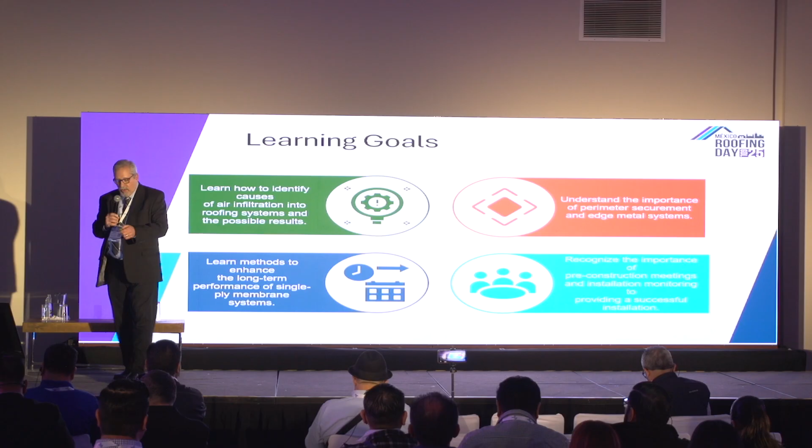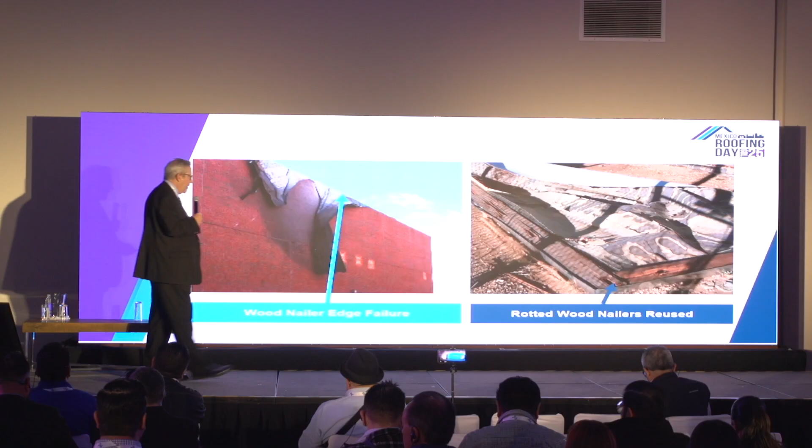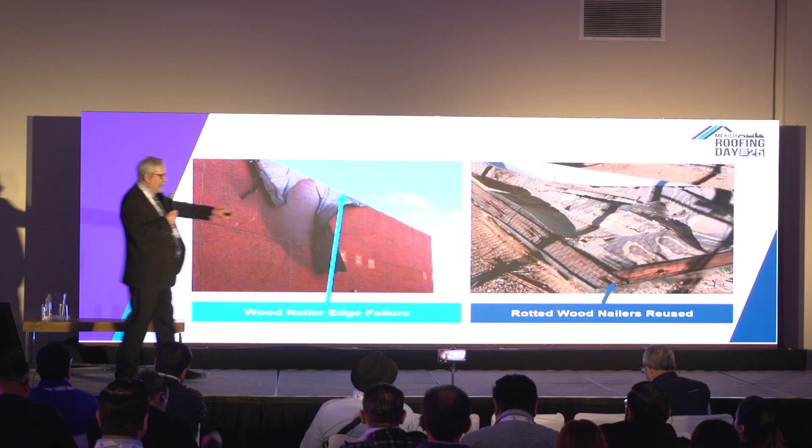Now, a lot of this stuff has already been talked about, but one of the things that actually keeps metalwork in place is going to be the wood nailers, the ones that we secure around the perimeter edge to make sure that we don't end up with these kinds of issues. And they have to be investigated, especially in re-roof applications. If the wood is rotted and has problems, it's not going to stay in place. If it's reused, it has to be replaced with new to extend that durability.

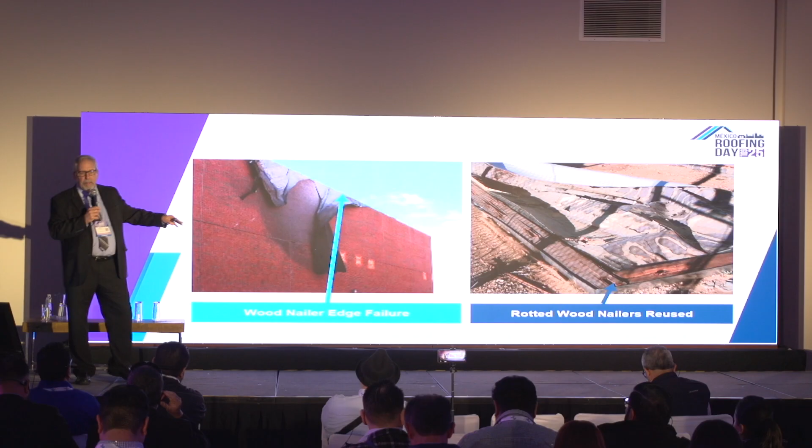And the last thing we want is to have our roofing material look like a banner on the side of a building, waving in the wind to the customers and the people that go by. It doesn't tell a good story at all.

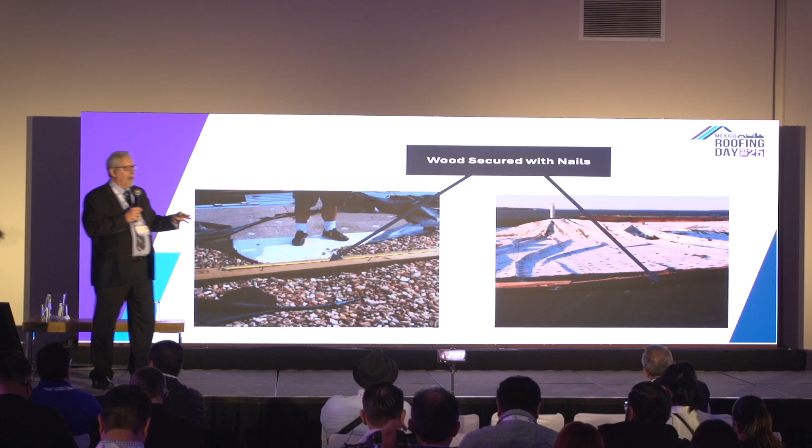There is some stuff like using nails instead of screws, and that's bad. Because nails go in really nicely. They go in straight, they go in fast. Unfortunately, it doesn't take a lot of work or effort to make those nails come back out. They come out just as easily. So when we're securing wood nailers, we need to make sure that we're securing them with screws so that they're tightly in place to be able to withstand the wind resistance.

There's a document that's out there. There's a lot of standards that can be used. This one is from FM. It's the Factory Mutual Property Loss Prevention Data Sheet 1-49. And it gives directions on how to install wood nailers to make sure they stay in place associated to the wind, giving them long-term durability. Right now in the industry, this is the strongest one that's being used. There are a couple of other ones, but this is the primary one.

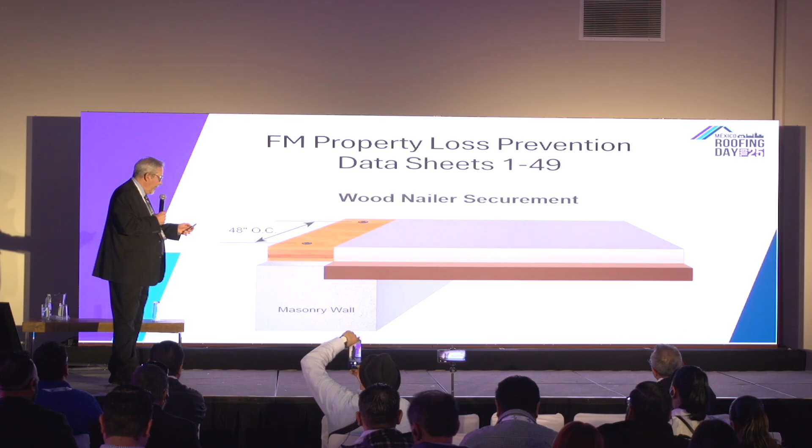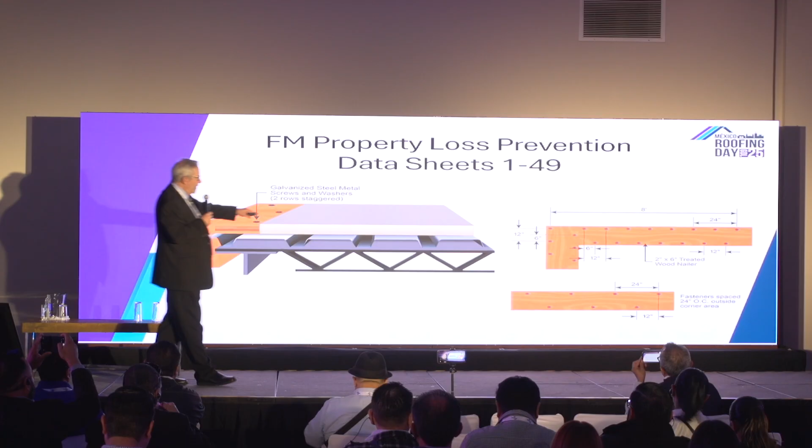This is for steel deck application. We're looking for 2 rows of fasteners staggered at 24 inches on center. But as we've discussed already in a couple of other presentations, wind resistance has different areas on a roof, such as the field, the perimeter, and the corners. So when the fastening gets closer to the corners, they double the fasteners to compensate for that additional pressure in those corners to make sure they resist the wind.

So these are some of the things to keep in mind. Review the existing conditions, specify screws, and try to follow the FM 1-49 or talk with your manufacturer or your consultant to see what the guidelines are, to make sure that these are all correctly followed. Then the metal edging goes on.

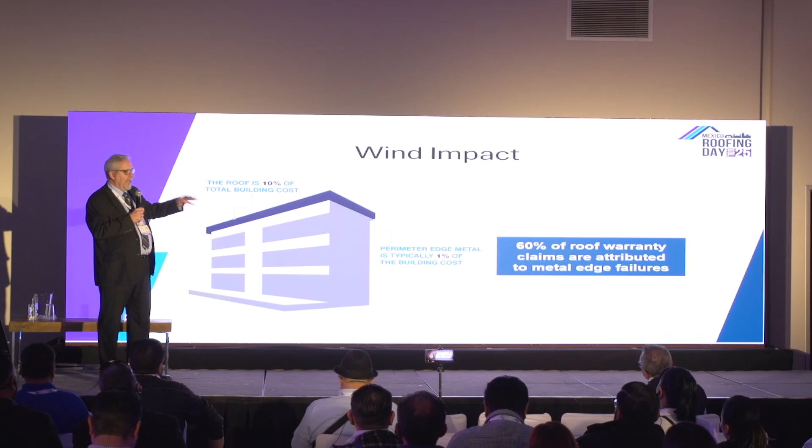Now, back in the US, we're finding that a building roof system costs about 10% of the whole structure. And out of that 10% cost, only 1% of it is actually the metal edging, the edging that holds the roof system in place. 60% of the litigations that we have and 60% of the warranty problems that we have are associated to wind and to the metal edging. So this is one of the biggest performance issues out there versus the roof system, and it needs to be enhanced accordingly to make sure that it's installed correctly.

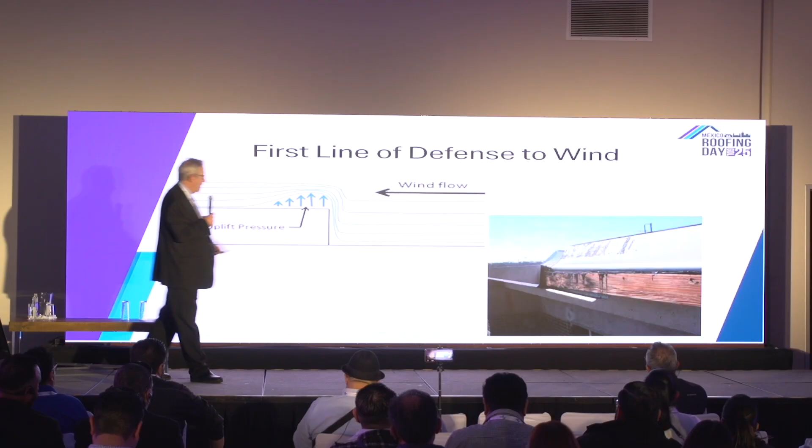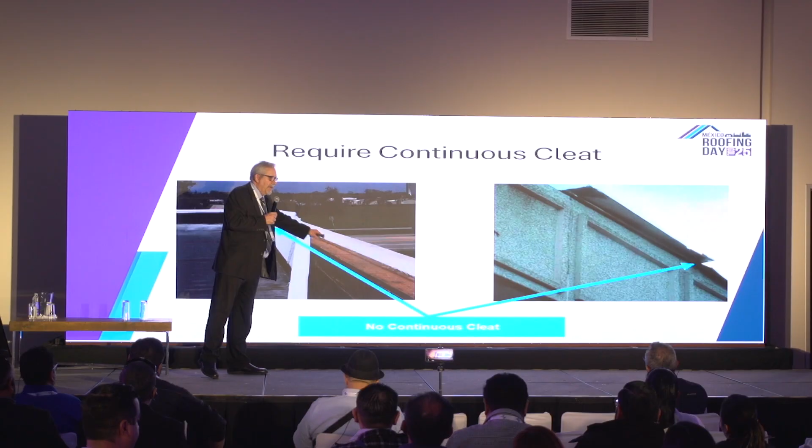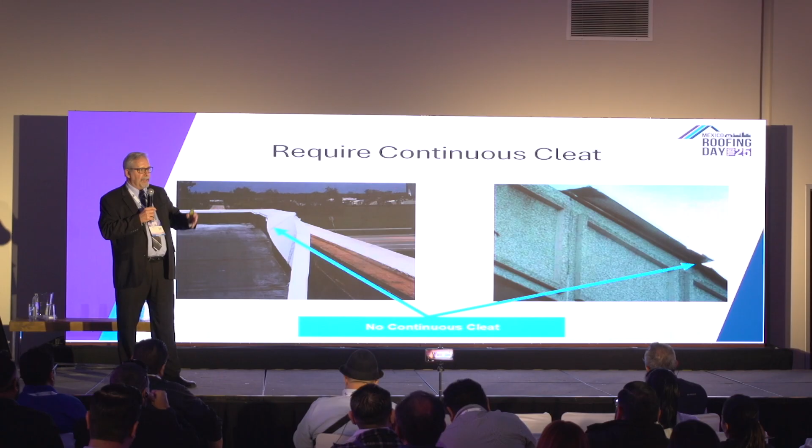These are some other conditions where they didn't use continuous cleat. Though I do like to point out that this particular one has got an EIFS or a Dryvit type of material. It's not really structural to start with, so that's another thing to look at when you're trying to install properly. Make sure the materials are compatible and that there's actually structural interface when you're using fasteners and screws. In this case, the wind hit the fascia of the building, came upward, grabbed the metalwork, and started peeling it free.

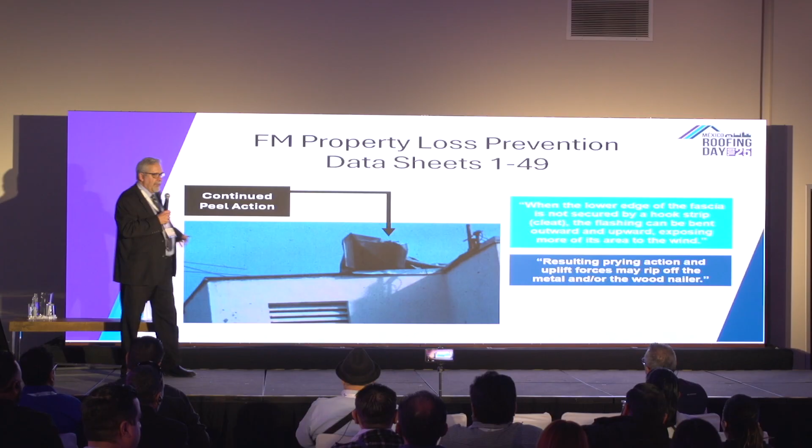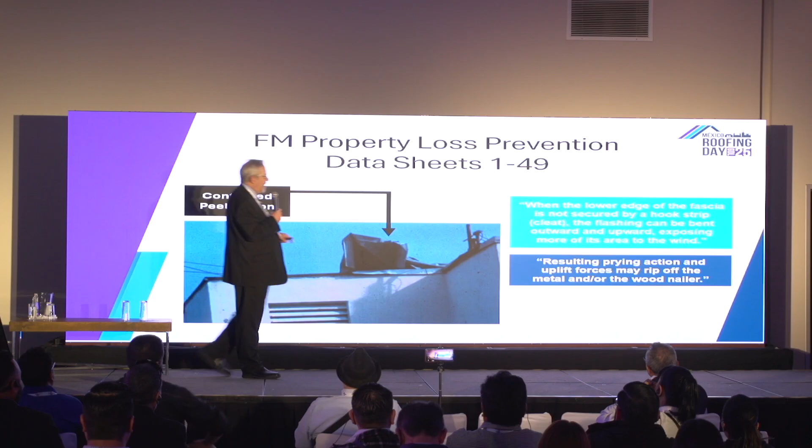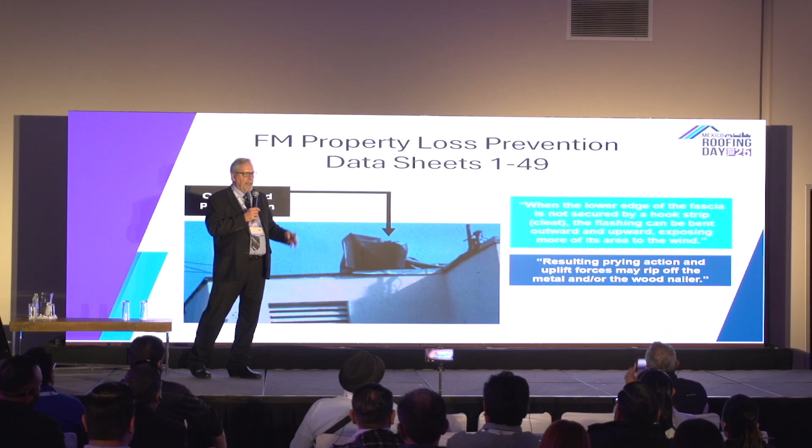Best case scenario, the roof system starts to roll itself up for re-roofing, making it easier for tear off. Not what you want, though. And these are some comments that came from Factory Mutual. When the lower edge of the fascia is not secured by a hook strip cleat, the flashing can be bent outward and upward, exposing more of its area to the wind's effect. The resulting prying action and uplift forces may rip off metal and/or the wood nailers, possibly leading to a catastrophic roof failure at that point.

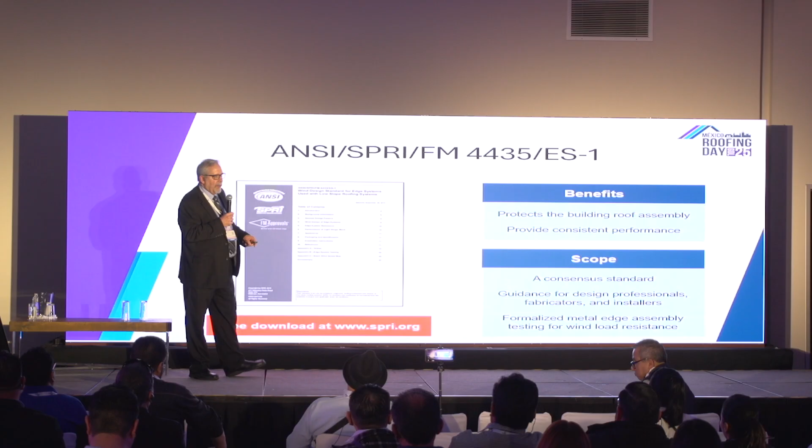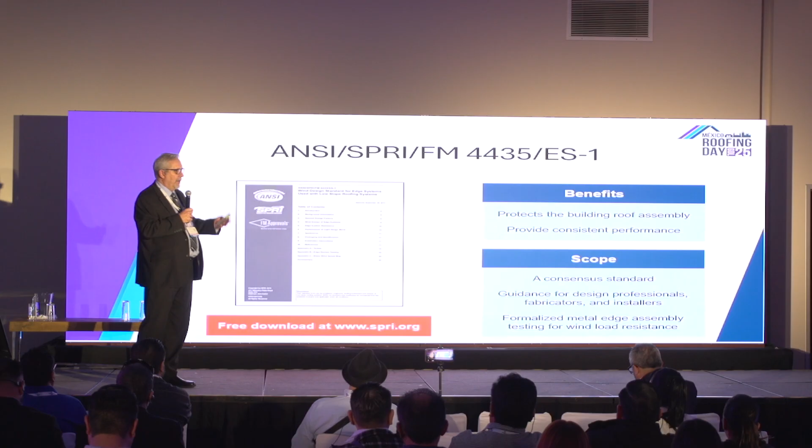To make sure that the metalwork meets this criteria, there's a standard, ANSI/SPRI/FM 4435/ES-1, better known as just ES-1. With this document, we are now able to test metalwork to meet the pressures associated to it. And this can be done with either prefabricated metalwork or shop fabricated metalwork. The difficulty with shop fabricated metalwork is that they need to be trained properly, following the correct guidelines, bending it properly, correct gauge, and then, of course, securing it the same way. So it needs to be all followed properly.

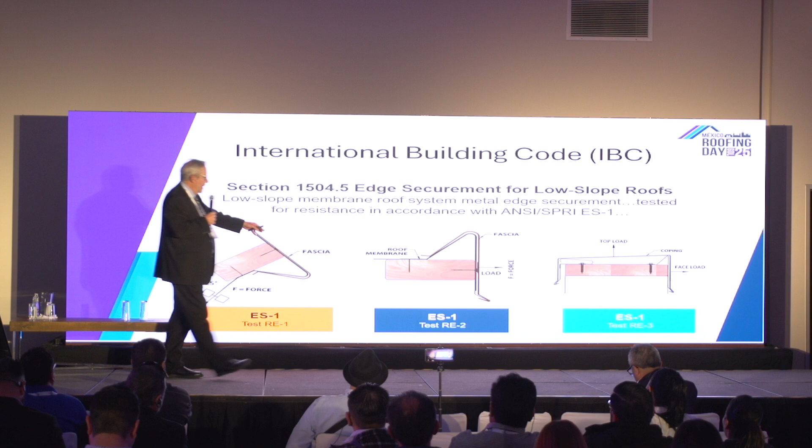This is the testing parameter that we use, where we have RE-1, RE-2, and RE-3. RE-1 is used for mechanically fastened and ballasted systems because the membrane behind is loose. RE-2 is usually used for all systems, where you have the force being pulled on the outside, and RE-3 is for coping caps.

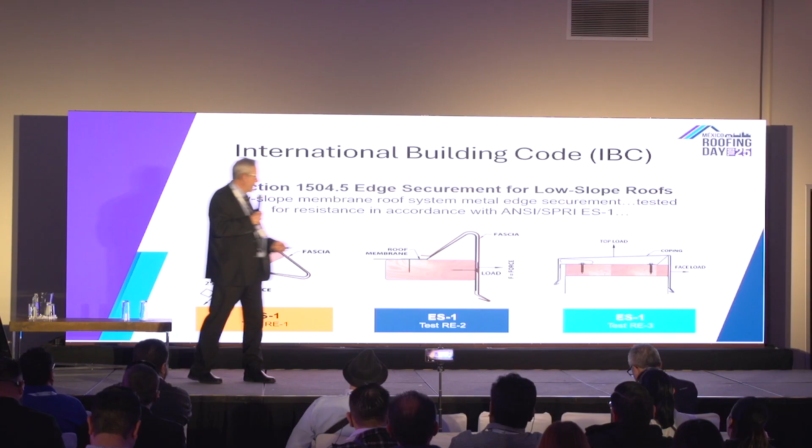I do apologize, I did not have time to convert this into metric, but you're all smart here. You're all kind of like engineers. I figured you could figure it out.

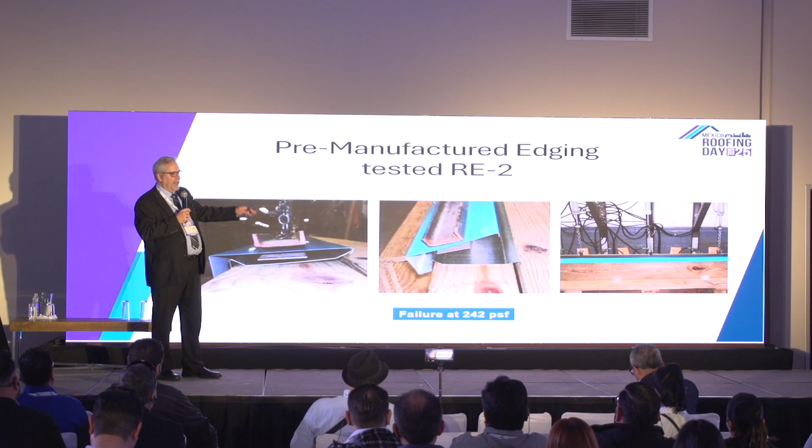This is a pre-manufactured one. This has already been tested in the laboratory. This one actually has 242 pounds per square foot, significantly better uplift performance in this application, and easier installation. And the only training you have to do for your guys is basically show them how it's installed. Some additional benefits: you get high uplift. The product is sustainable and reusable. These products can actually be taken off and then reused on the job again.

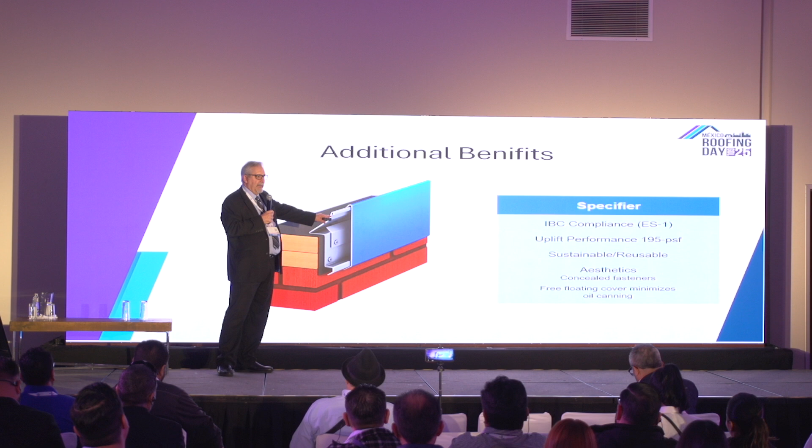I've also found a personal benefit where they have this fascia cover. It's separate from the actual waterproofing or watertight condition. Say if a ladder hits this and damages it, it's easier to pop it off and replace it without ever having to affect any kind of flashing material or watertight integrity of the system. So keep that in mind.

Cost is a big deal. Replacing the roof is a big deal, and it doesn't cost very much to put a proper metalwork that meets the ES1, be it prefabricated or shop fabricated. Reducing that criteria, the biggest thing is remembering that continuous cleat.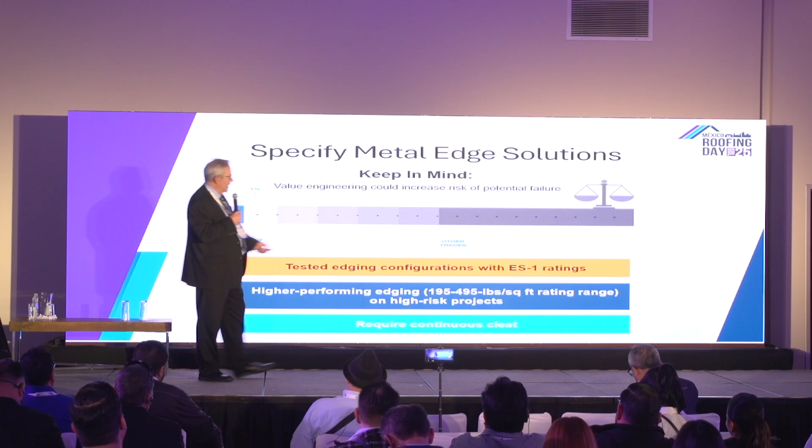Internal and external air pressure: a lot of this is external pressure we deal with a lot, but internal pressure a lot of times is sort of ignored because that's supposedly been addressed somehow in the engineering. Unfortunately, there are certain factors that come in that affect the roofing system that are unexpected.

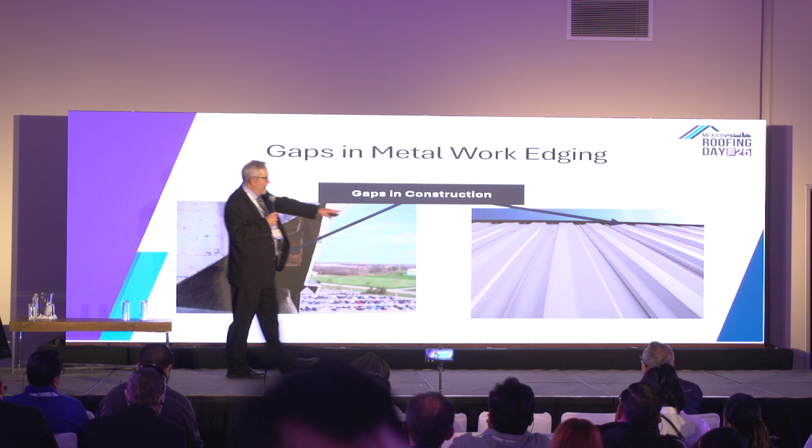This is just sort of a little bit poor construction where there was actually an opening within the metalwork, so the wind just pumped right into the roof system, weakening its wind performance. In this case, there was a gap underneath because the corrugation of the metal wall went under this capping, and that air pressure moved itself in.

In this design, this is a parapet wall, and below they did not seal this parapet open cavity, so all the hot, humid air from the interior of the building migrated into this wall, found a place to condense, and it caused rotting and mold problems where they started having issues.

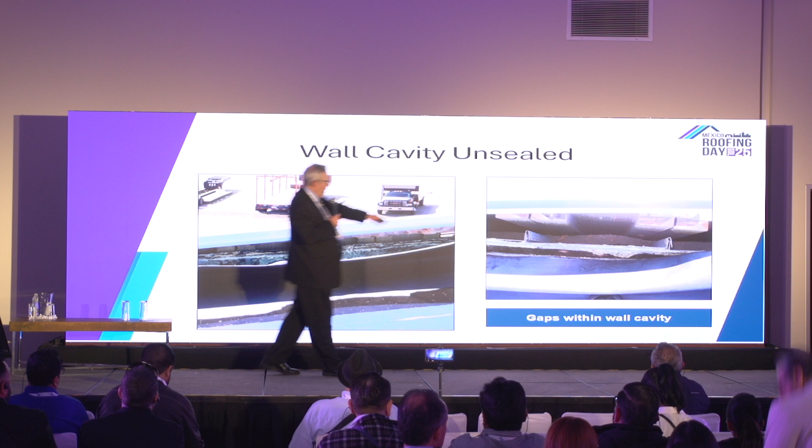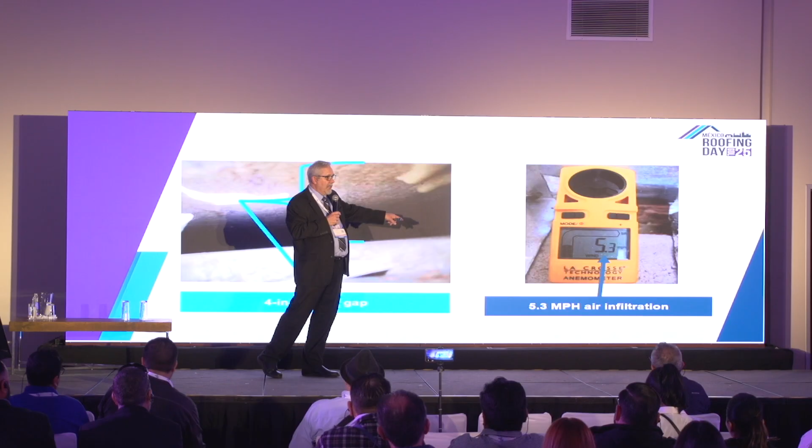And this is just a close-up seeing how big that gap actually is. Since they didn't seal it up, it just allowed a lot of pressure to build up into it. This is a 4-inch wide gap, and they got 5.3 miles per hour wind coming from that. So a significant amount of wind force being presented by pumping that directly into the roof assembly and weakening its performance long-term.

This one actually has an air barrier that failed, and that's the air pressure that's coming out from inside that building. Since that failed off that wall, and since this is the primary waterproofing membrane right along there, all that went right into the roof system. And whatever was carrying it, if it was hot, humid air, or just air pressure, it started to weaken the system.

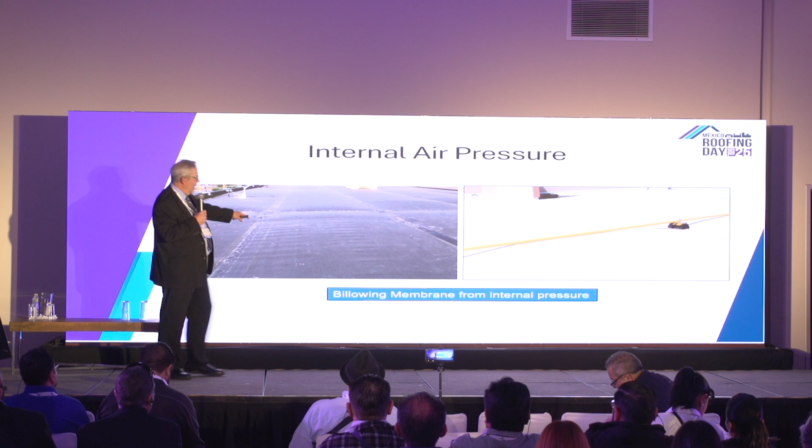And this is what it might look like. Very active HVAC units, internal pressure within the building, and this is a mechanically fastened system, so this membrane will continually billow with this kind of additional pressure. It's not going to weaken the rating associated to it, but it could fatigue the membrane long-term and cause some problems. So we want to control that so we don't have that type of pressure.

There was a project that I had actually in Philadelphia, Pennsylvania, and they had an adhered system. The membrane was adhered to the insulation, and the internal pressure was so great that the membrane popped off. They came back and tried to reapply the membrane, and it popped off again because the internal pressure was so great the adhesives could not cure up.

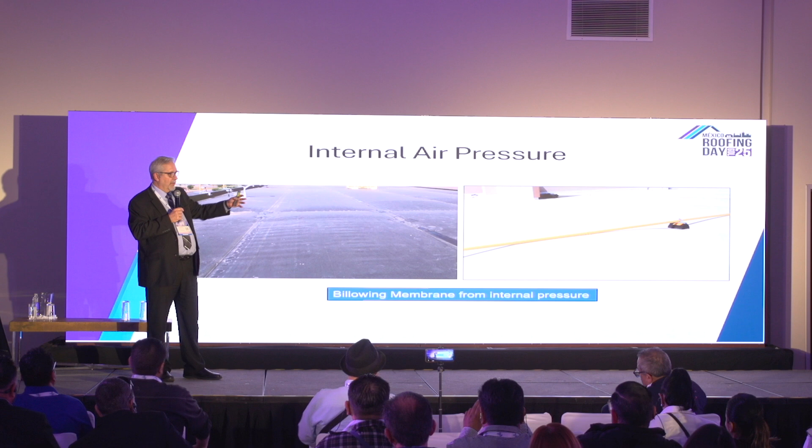They did a lot of searching and found out that this was a 60-story building, and all the air pressure was building up as it stacks up throughout the building. So when it got to that point, they found a hole that was actually pumping air into that space. Once they closed that off, they were able to finally repair the roof. But that took 6 months of investigation to find out.

So it's very important, if we're trying to minimize wind performance issues, to isolate the system from the interior pressure. If it's unknown, it's always a good idea just to seal the penetrations at the deck level and seal the joints between the deck and walls. That way, at least you're mitigating that much pressure from getting into the system.

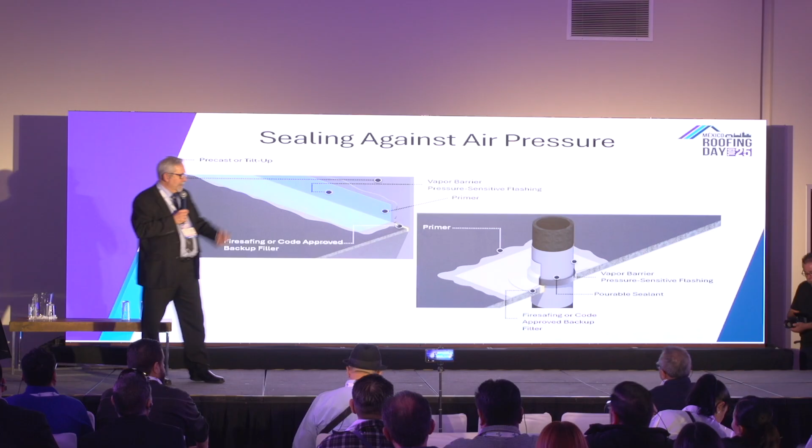Steel decks might be a little bit harder than doing that, so you may have to use some kind of sheet good to basically seal it up, making sure that all that air pressure is caught inside the building and doesn't move into the system itself. So outside airflow must be sealed, so you don't have any kind of problems. Sealing cavity walls in the interior and sealing the deck and penetrations are very important.

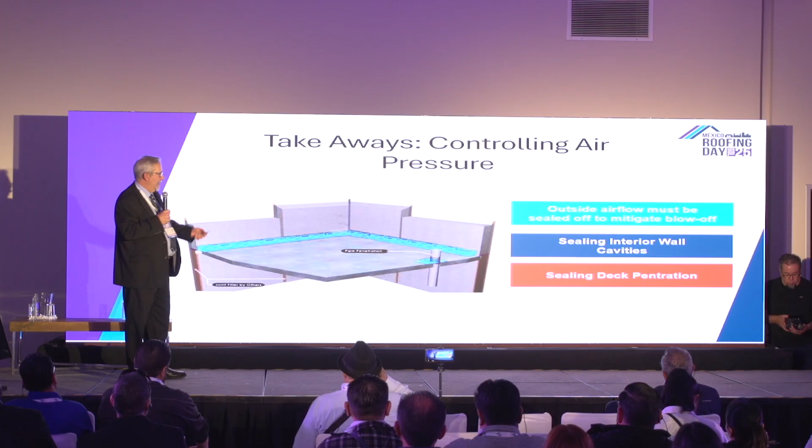Now, standing seam metal roofs, or metal roofs around here, are very popular. So this is some of the things that we've been seeing. There are a lot of different configurations of metal roofs and how they're used, from corrugation to fluted.

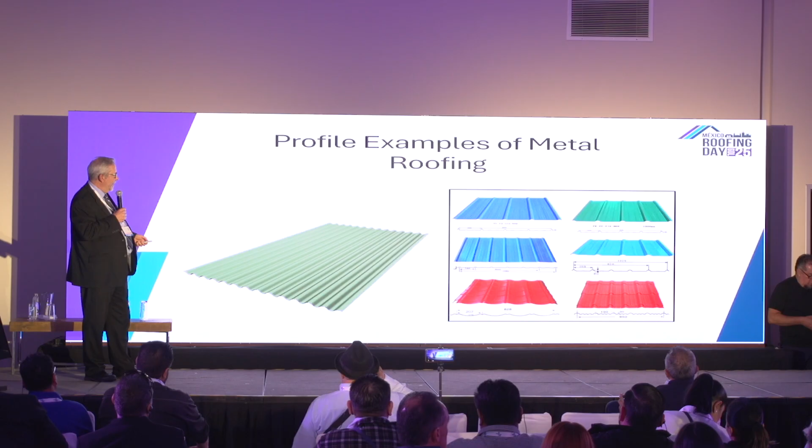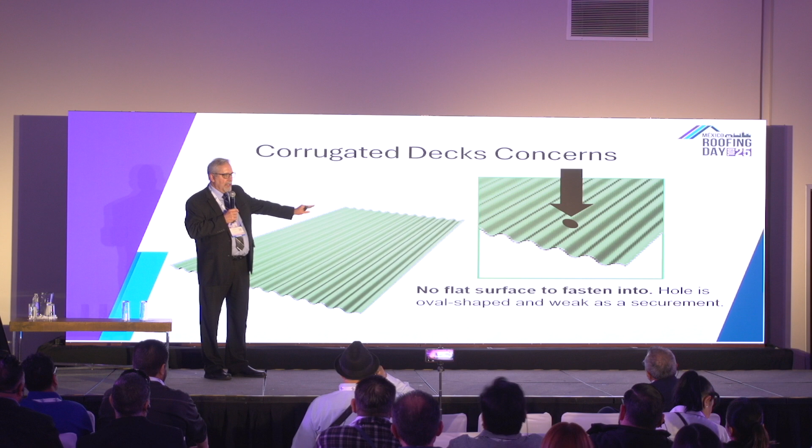Problem with corrugation is that I've had people actually try to install mechanically fastened systems directly over these things. And what happens is, mechanically fastened system, the fasteners are designed to go perpendicular into the metal deck. When you have a curvature, you're not getting a circle, you're getting an oval, and the fastener is not working properly. And you could actually have a ratcheting effect where the fasteners will slowly back up. So it's not a long-term performance that's going to happen. You're going to have a very weak system long-term wise.

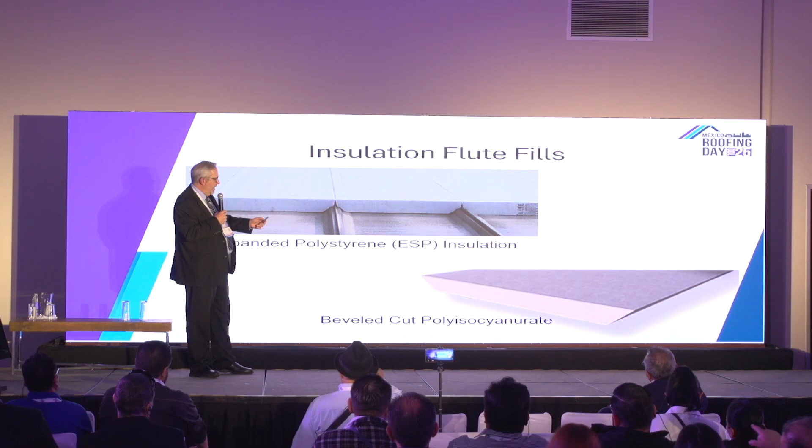Other systems with the flutes, typically what we do is we fill them up with insulation, and then we put the system over the top of it. And manufacturers make these bevel cut products to be able to fit into them properly.

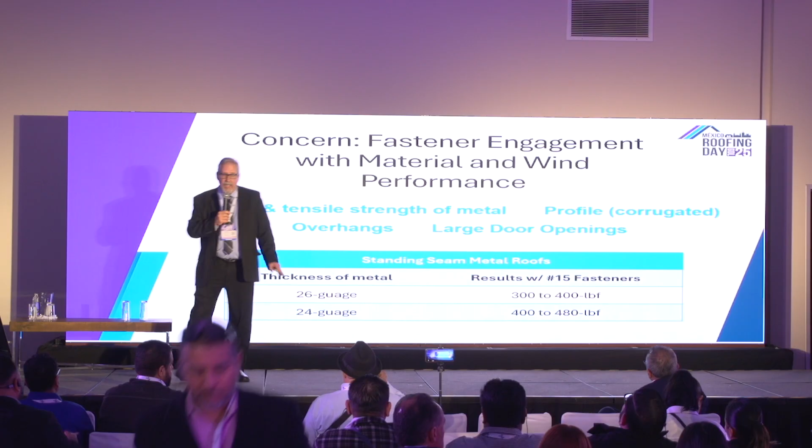When you're looking at fastener engagements, typically if you're trying to go right into the pan, they're usually 26 or 24 gauge, so they're very thin. Using a number 15 fastener, you typically only get the 300 to 400 pound pull values out of the weaker materials. And these materials are not tested in laboratories. They could if they wanted to. There's actually a protocol within the design criteria for doing that, but manufacturers don't do that because they know it's going to fail. So they don't do it.

So keep that in mind that these decks, though they will accept the fasteners, they need to be looked at very closely to be able to confirm you're meeting the pressures necessary to withstand and be resilient.

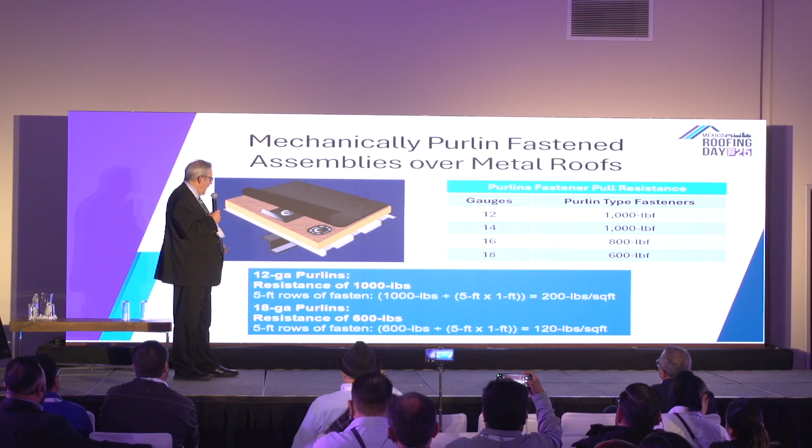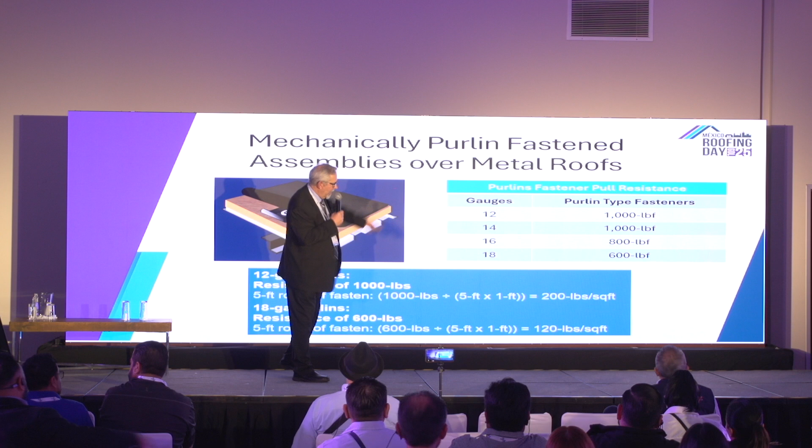Most of the designs that are offered are fastening into the purlins, and the purlin fastener engagement is very, very strong comparatively, where we're getting from a 600 pound pull to a 1000 pound pull, and those calculations or those fastenings come out to a very significant performance characteristic of 200 pounds per square foot. So fastening into the structure versus the metal pan is going to give you the long-term performance that you want out of that system.

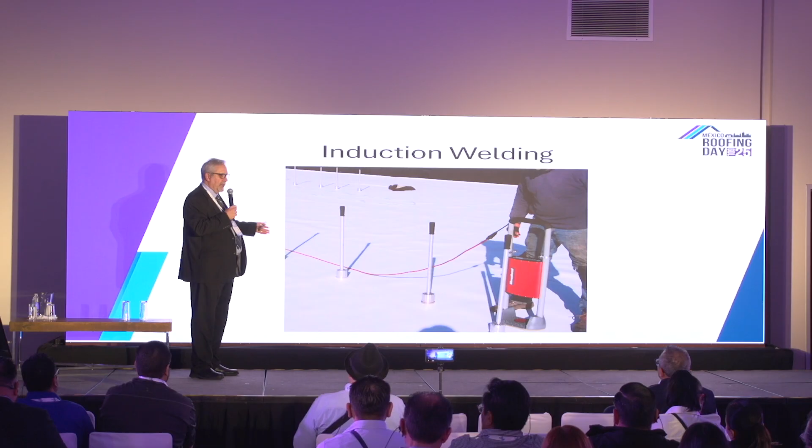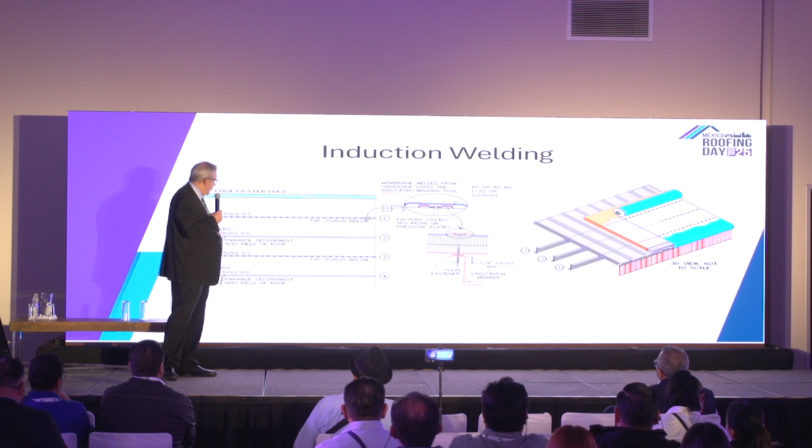And there are other types of systems to help make it even more convenient. There are these induction welded systems where you can fasten the plates into the purlins and then heat weld the membrane directly to it. So you don't have to have custom made sheets. You can just use whatever the manufacturer offers, very large ones, and you just have to heat weld the seams accordingly. And there are specifications on how to lay out the plates for perimeter areas. They're usually what we refer to as fingers coming in the edges, and that gives you an idea of how to make that actually a very aesthetically looking type of design.

Now there is a third way of doing it, and you could do adhered systems to it, where we're actually going to be fastening in the insulation to the deck metal pan. Calculated wise, it does come out reasonable, between 75 and 100 pounds per square foot, and then you can adhere the membrane. So you fill the flutes, put your insulation or cover board, fasten it down, and then put the membrane down in adhesive.

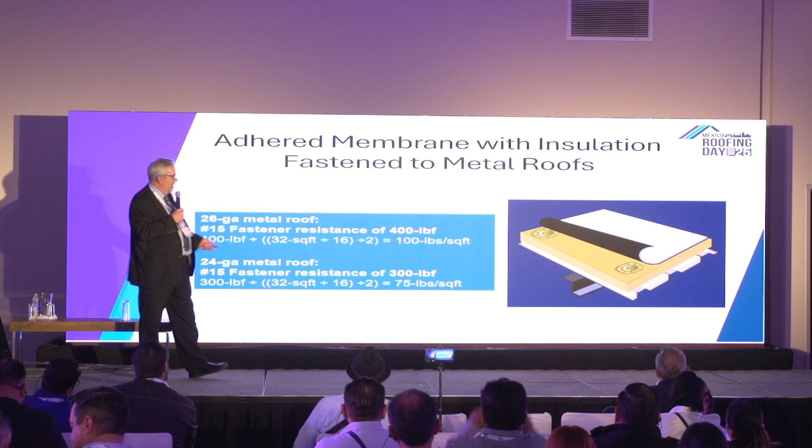Then there's also ribbon type of applications, the 2-part urethane adhesives, where you can actually do a serpentine pattern in the pan and flute, fill up the insulation, then continue the insulation with a cover board, and then you can put down your membrane system. No fasteners are used at that point.

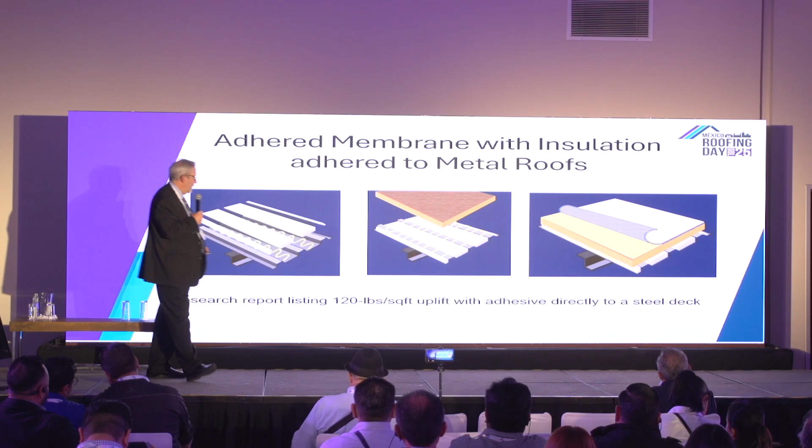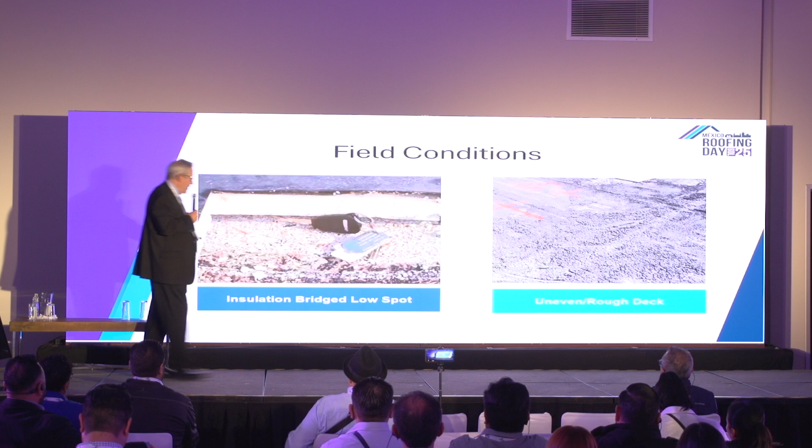Insulation adhesives sort of leads us into this, because we want to make sure that we have correct surfaces to apply the 2-part urethane adhesive. This is a cementitious wood fiber, but it was uneven. So the boards were not getting good engagement with the adhesive, and they were getting weak attachment. Concrete is supposed to be smooth; this is looking very rough and uneven also. So those are surfaces that we do not want to try to use adhesives on.

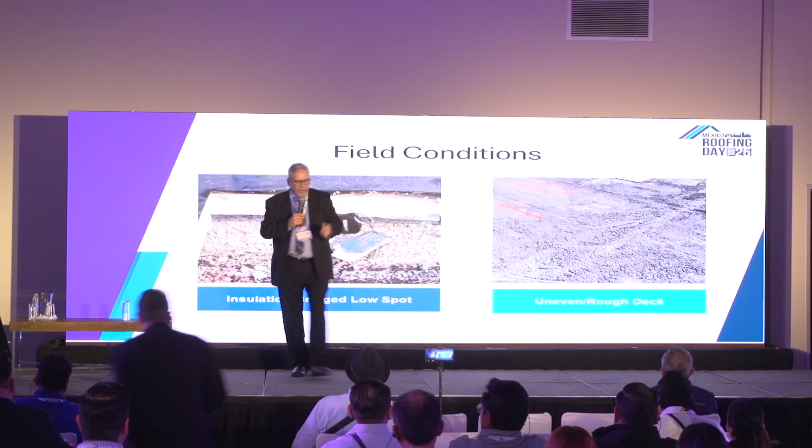And then in re-roofing applications where you have a modified or built-up roof, look at the surface of it, see what kind of condition the existing BUR is in. If it's questionable, we found that priming it with a primer prior to using the 2-part urethane adhesives, you get significantly better performance. So for instance, non-primed is only 60 pounds per square foot. With priming, we got 540 pounds per square foot. So significantly better performance for a long-term system.

And then application concerns. Don't wait too long to put the boards in. There is a time limit, and it needs to be followed. If you let it cure out completely, the boards will not stick. Make sure we have enough even coverage of the adhesive. Using half the amount of adhesive is not going to give you half the performance, it's going to give you far less than that. People have asked us, well, you guys as manufacturers always put belt and suspenders into the designs you're specifying for us to put down. That was true 30 years ago.

The industry has gotten extremely competitive. There is no more belt and suspenders that any manufacturer uses within their specifications. You have to follow what we write and the coverage rates to make sure that the system goes down properly and will stay in place. This is a chance to show that ribbon width is very important. We specify that. It needs to be followed. By putting in just a thin pencil line, you're not going to get long-term performance.

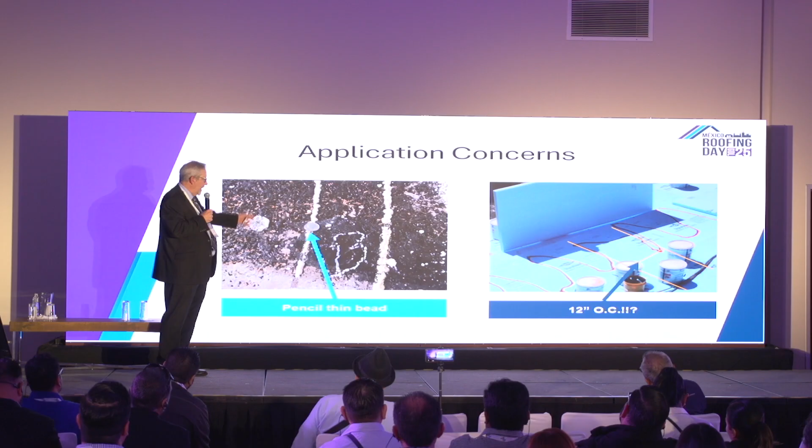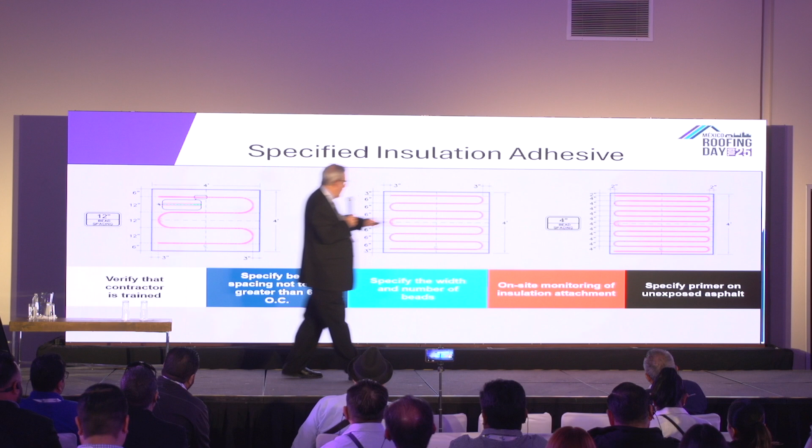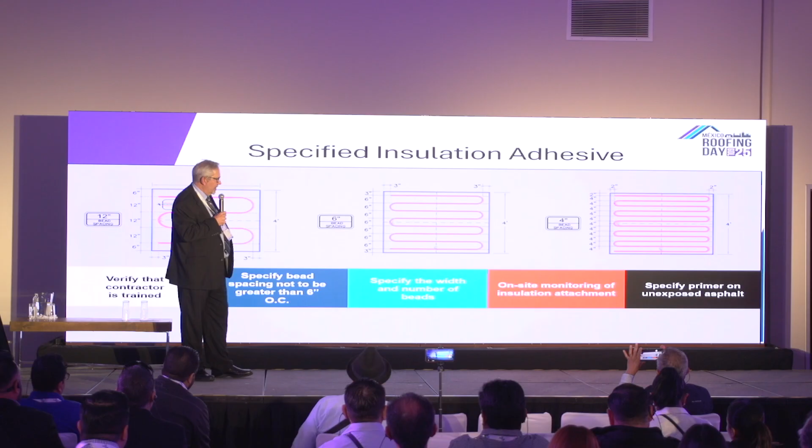Basically, maximum spacing is 6 inches on center. This one is definitely much larger than that and shouldn't be used. These are the patterns that you typically would see, between 12, 6, and 4. There are other kinds of odd ones that could be used depending upon whose standard you're following. And these are some of the things that you need to keep in mind when you're trying to install the roof properly.

Bonding adhesive coverage rate is also important. Typically in application, we see roller type products with solvents, and there are also cylinder type applications where they can spray it down. They let it sit for a minute so you get the correct tackiness, and then they put the two products together.

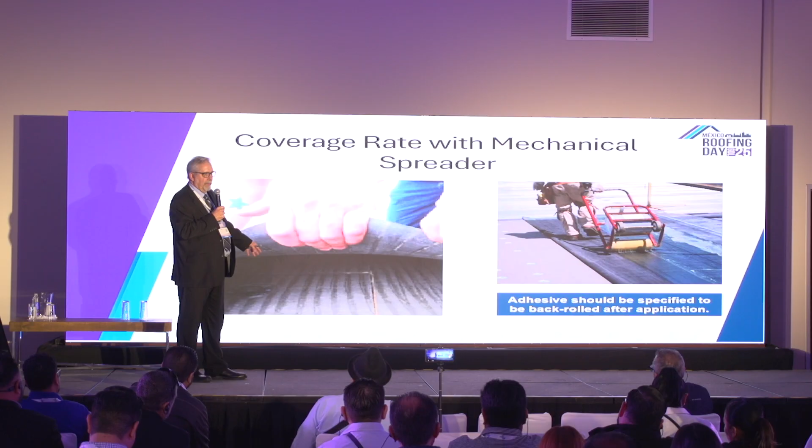This one was actually that type of application where they ended up having very poor application, and the wind took it and started taking the roof off. They reported this as being 50%. I think it's a lot less than that, but this is what we can see, and it's not gonna last. It doesn't take much wind to actually start to make that fall off.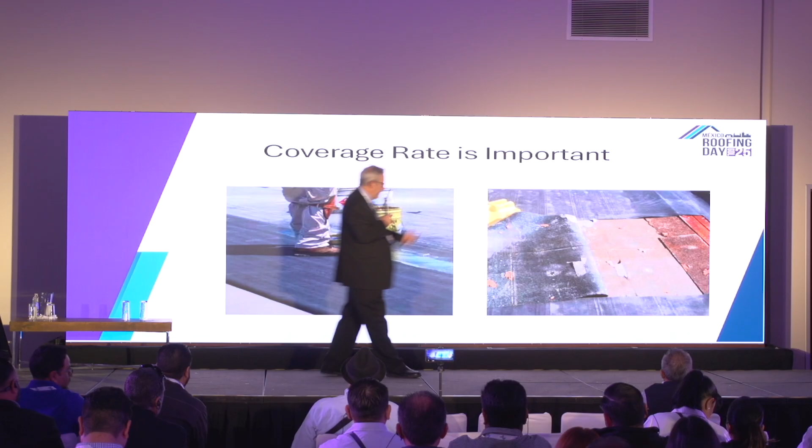And then, even with roller application, this one they only put adhesive on one side. So they put it on the membrane and then tried to roll it onto the substrate, and nothing stuck. It just basically came off. So these are some key pieces to consider. Specify back rolling when you see that particular product being used. Avoid porous type substrate materials and low VOC materials, which is very popular in the States. Maybe more time is needed for flash off if it's been specified down here.

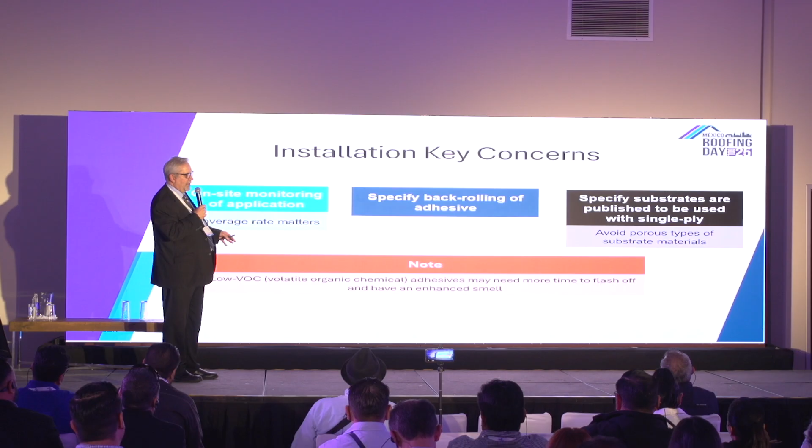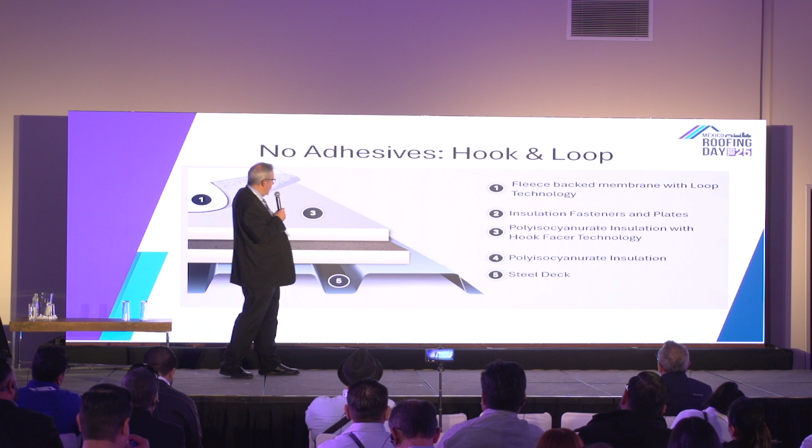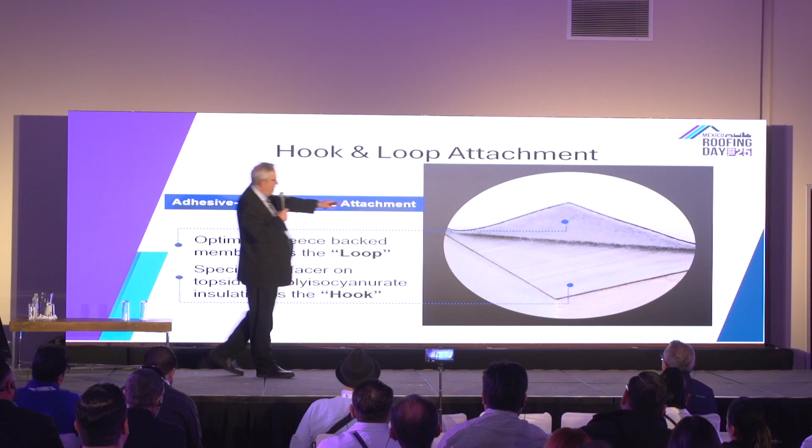One of the advanced technologies, if you don't want to even deal with adhesives, is this hook and loop kind of product. They sort of reference it as Velcro, where the hooks are in the facer of the substrate, and the loops are in the membrane, and you basically fasten this down or adhere it down, and then you go ahead and roll the special membrane onto this, and then you get very, very good performance.

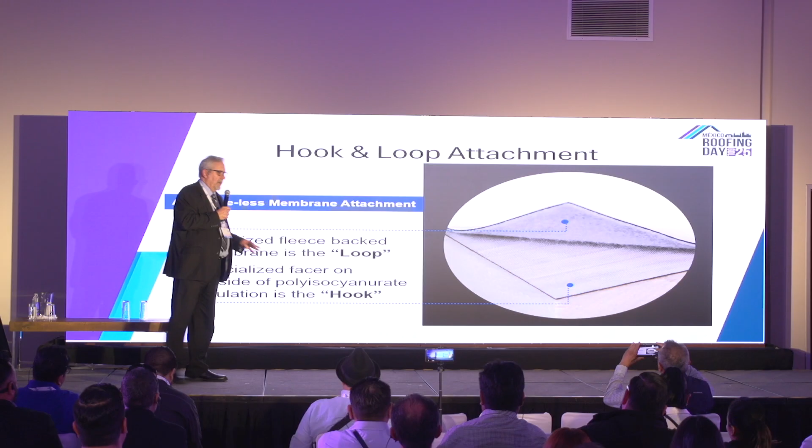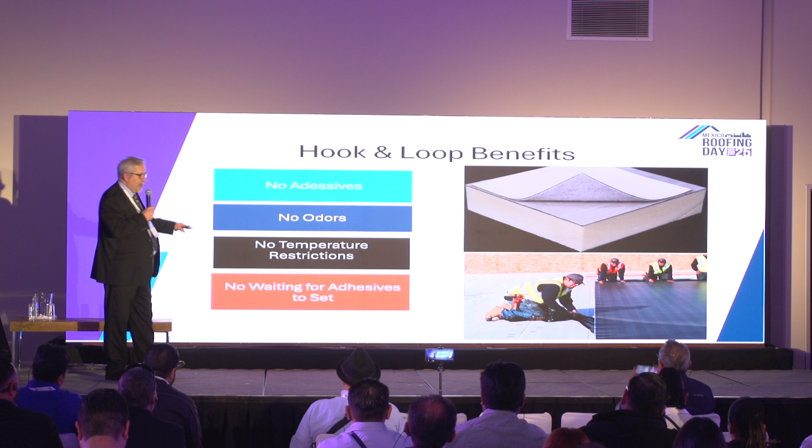No adhesives. This works really nicely on operating buildings where a building owner is concerned about smells, like a hospital, those kinds of configurations where you may need to avoid those things. And so no adhesives, no odor, no temperature restrictions, and no waiting for adhesives to flash off.

Last section, sheathing boards. This is something that I've been seeing used quite a bit, where they're using the sheathing board that's on the exterior for, say, siding or the wall, and then they come on the back of the parapet and they use the same board.

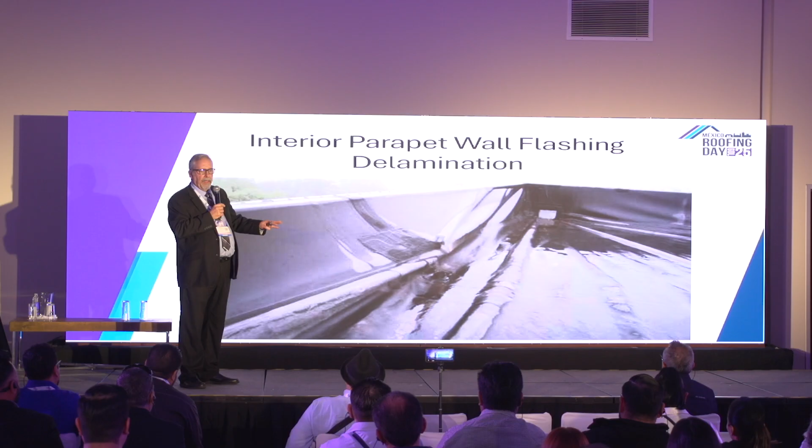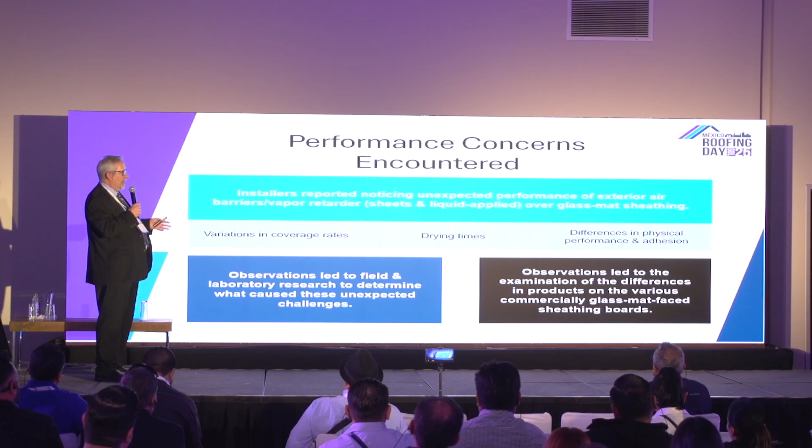This was a study that was actually done and was presented at RCI back then, now IIBEC, where they had glass-faced sheathing boards, and they were having problems with them. Installers were reporting noticing unexpected performance for exterior air barriers and vapor retarders. Basically, the product was coming free. And they were trying to do all this analysis to determine what was causing that problem.

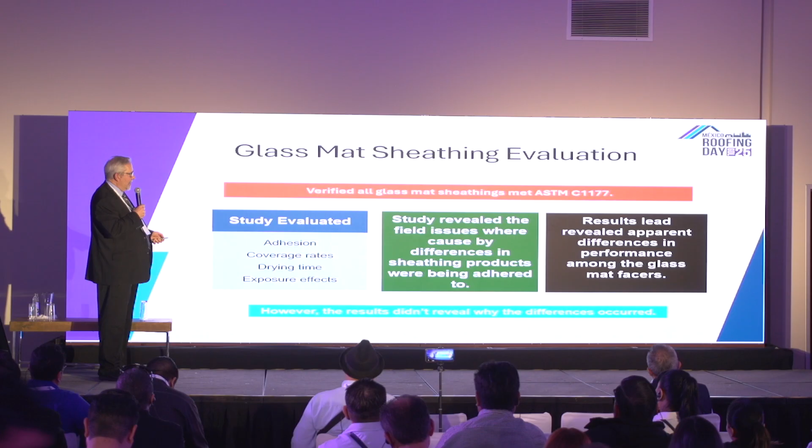So they started to look at it very closely, and they verified that all the boards meet the ASTM criteria for each of the boards. But the facers were what they eventually boiled down to, and found out that there were some issues associated with the application of the adhesives or primers. So they went to an even farther study, and they started looking at the sheet goods under magnification of 50 times, and they went as far as 100 times to see what might be the difference in those products causing the application issues.

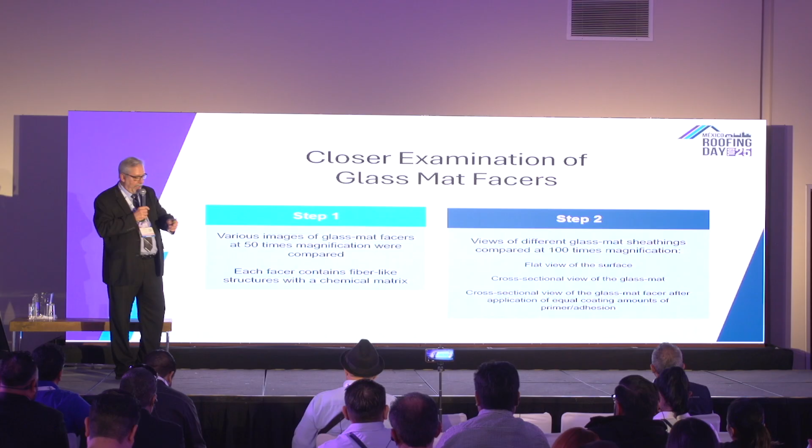Now, for roofing material on the back of the parapets, even though we've been seeing this, we've always stated to use roofing boards, the same boards that we used on the surface of the roof system to adhere to, and we've tested in the laboratory. Those boards should be used on the parapet wall. If you see a sheathing board that's used for the exterior on the interior, that board needs to be overlaid. It's very important, because the flashing will eventually fall off.